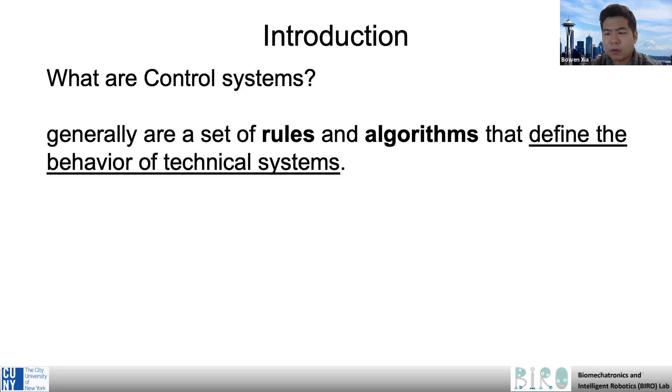And in our case, the control system is responsible for the amount and timing of support provided to the user by the exoskeleton. So in order for a control system to work, sensors and actuators are needed.

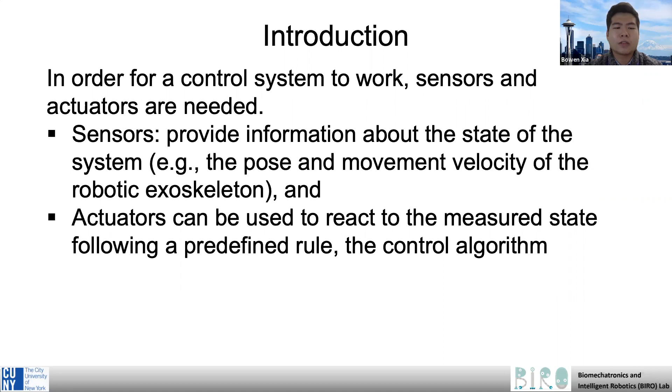We've learned two sensors already. The sensors provide information about the state of the system, for example, the pose and movement velocity of the robotic exoskeleton. Actuators can be used to react to the measured state following a predefined rule, the control algorithm.

That will be the error. And this difference is then sent to the controller that adjusts, for example, the motor current, opens and closes a valve, or executes an action to push the system, which is called the plant.

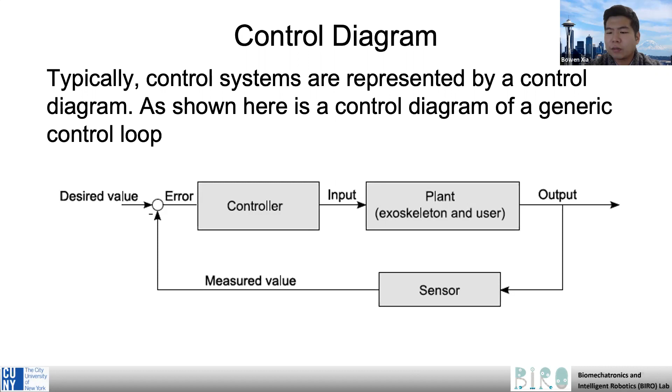The desired value can change over time, and the job of the controller is to make the system follow these changes.

For the controllers, there are high-level controllers and low-level controllers, and normally they are distinguishable. The high-level controllers, sometimes called a control strategy, are a set of rules that defines, for example, in which situation the exoskeleton provides assistive force or executes a guiding movement. The high-level control can include user intention detection to ensure the exoskeleton support suits the user's momentary needs. The lower level control system is responsible for the individual joints and actuators providing that desired support.

It is not uncommon in robotic exoskeletons that the user or a second person remains at least partially in control of the high level control system, for example by controlling the exoskeleton manually by pressing control buttons. However, there are several approaches for exoskeletons to autonomously detect the user's movement intentions and support needs, for example by measuring the user-exoskeleton interaction force or the user's muscle activities.

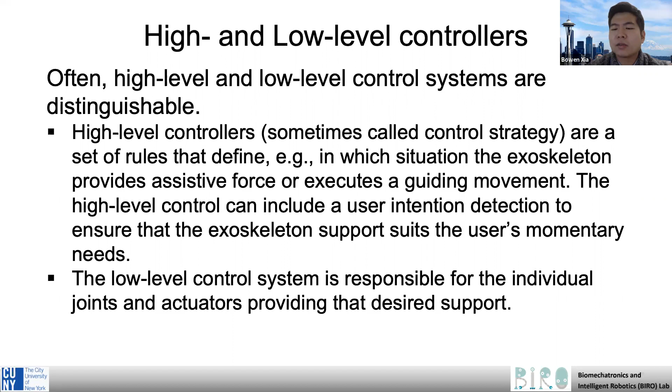The two following examples will help illustrate how the behavior of a robotic exoskeleton is defined by its control systems. The first example would be a control system of a gait restoration exoskeleton.

To control an exoskeleton for gait restoration in users with paraplegia, manual control inputs combined with a position controller are used. As the user's legs are completely paralyzed, the exoskeleton has to provide all the power required to move them. So in this case, the higher level control is implemented as manual control by the user.

Buttons located in the handles of crutches, which are required anyway for balancing, are used to select and initiate movements manually. Different types of movements are recorded and stored in the exoskeleton's control system, and these recordings provide the desired angle trajectories for each of the actuated exoskeleton joints. The movement is triggered by the user.

The low-level joint position controller executes the recorded joint angles, replaying the movement. Then the exoskeleton automatically continues to execute consecutive steps until stopped by the user. Each step can be triggered manually by the user, who then remains in command.

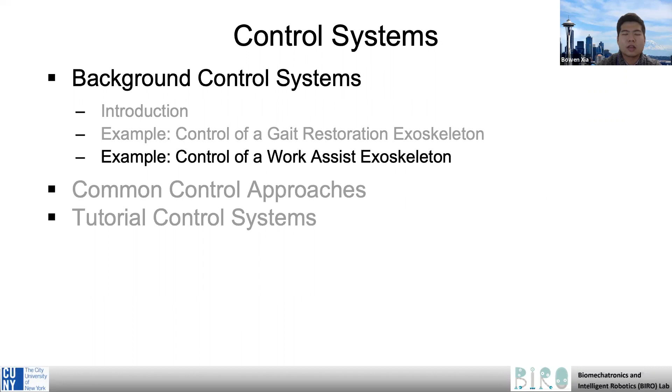The second example is an upper body exoskeleton that supports the user when lifting heavy objects. The device is connected to the user's back and hip like a backpack, and it relieves the user's arms when lifting and carrying a payload.

To detect when the user needs support, sensorized gloves are used in high-level control. A pressure sensor in each palm measures when the exoskeleton user is carrying a heavy object, and only then is a desired vertical assistive force activated.

In this case we are using sensorized gloves, but in some other cases, when there are no gloves, we can detect the force on the arms. We can detect the position of the upper body, and there are a lot of ways to detect whether we are raising our hand, carrying a heavy object, or doing some other task. There are a lot of ways, and here it's just giving us a very brief introduction and the most basic.

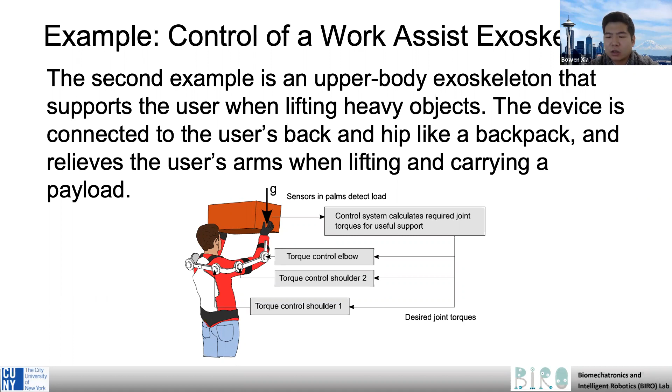How often such a cycle is repeated is defined by the control frequency, which is usually somewhere between a few hundred or a few thousand times per second, hertz. Typically, the low-level control is faster with higher frequency than the high-level control, to give the joint controller time to execute a command before a new command is received.

Now let's talk about the common control approaches. As part of a very large world of control systems, let's take a look at common low-level control approaches used for exoskeletons and other haptic devices. They mostly differ in which variable or physical value is controlled. For closed-loop control, we can only use variables that we can influence and also measure.

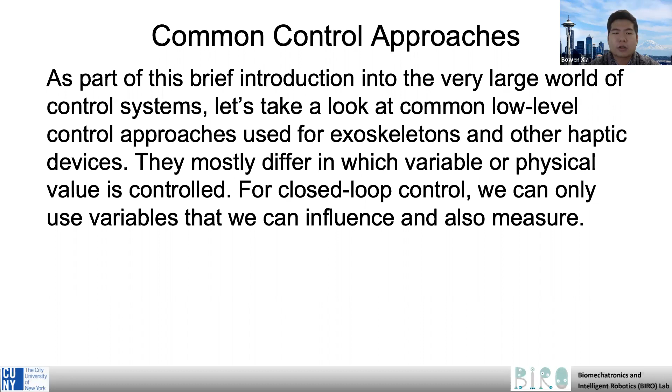So the first one would be position control. A position controller controls a position, the joint angle of the exoskeleton. The controller focuses on only one aspect: to move the exoskeleton joint to a desired angle. It will change the motor's torque until this desired angle is reached.

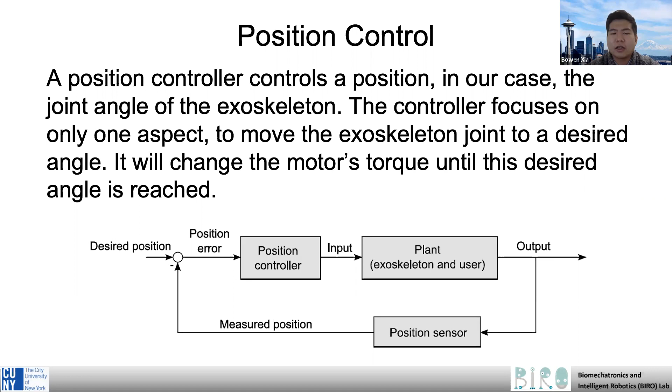Position control systems are very useful to support rigid guided movements or to limit the range of motion of a user, which we'll talk about later in the virtual wall. And then we have the force and torque control. A force controller or a torque controller directly controls a force or a torque. Torque controllers try to keep a predefined desired torque without regard to the angle. Thus, in our case, if the user applies a torque that is higher than the desired joint torque, the exoskeleton will move. It's kind of a trigger.

A closed-loop torque controller requires a force or torque sensor. It also requires the ability to directly change the force applied by the plant, for example, by increasing or decreasing motor current. Force and torque control systems can be very useful to provide support, for example, an upward force to assist lifting without restricting the movement of the user.

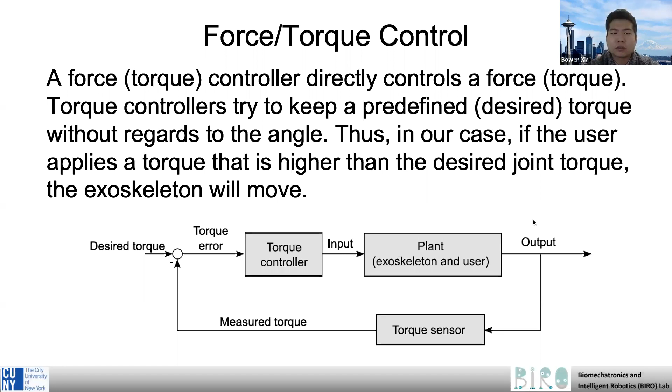And then we have impedance and admittance control. So in an impedance controller, position is measured and force is controlled. In an admittance controller, the force is measured and the movement is controlled accordingly. So they're very similar, but the control variable and the measured variable are different for the impedance controller and admittance controller.

So we have a force sensor to measure the interaction force, and the low-level servo controller is a position controller. Thus, we will use admittance control in our exoskeleton. And in such an admittance controller, this rule often imitates the behavior of a mechanical system: the spring, the damper, the mass. As a simple example, you can think of a controller simulating a mechanical spring. When no force is applied and measured, the robot stays where it is. When a force is applied, the robot moves from its initial position by a distance that is proportional to the force. Thus, the robot behaves as a mechanical spring with a defined stiffness, even though there is no physical spring.

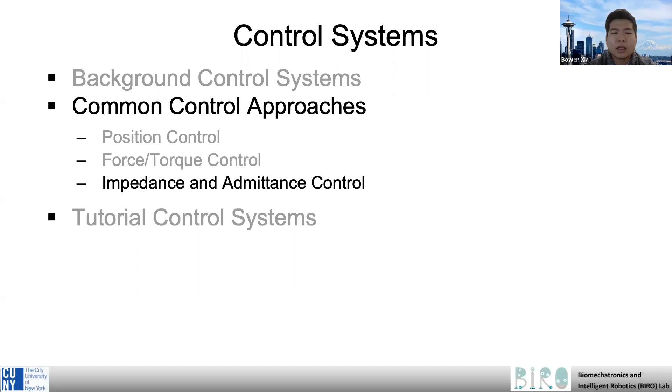So the impedance and admittance controller is in between the position and the force controller, and they are often used when a force sensor measures the interaction.

What happened with him? Hello. Hey, what happened? Yeah, you got cut off. So where did I lose the connection? I think the slide before this, it was going on and off.

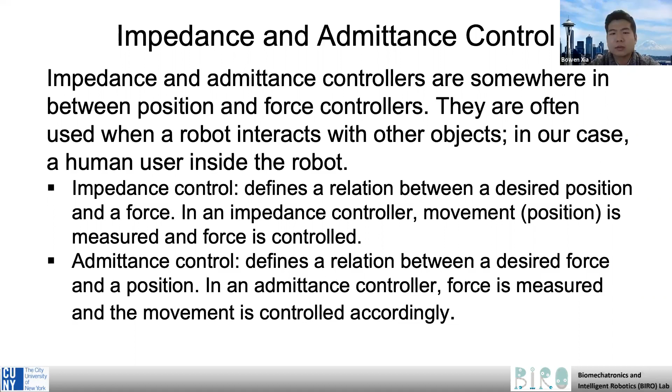Oh, okay. So basically, these two pages are telling us that impedance and admittance control is a combination of the position and the force controller. And we are going to use admittance control, where the input is a force and the output is the position. That's pretty much everything we talked about in these two pages. And here is a simple example. You can think of a controller simulating a mechanical spring. When no force is applied and measured, the robot stays where it is. When the force is applied, the robot moves from its initial position.

Sorry, let me let the students see. Okay. So the robot stays where it is. When the force is applied, the robot moves from its initial position by a distance that is proportional to the force. And thus the robot behaves as a mechanical spring with a defined stiffness, even though there is no physical spring. And we can see this is the control algorithm. The difference between this one and the position controller would be this force error we input to this admittance controller, which will give us a desired position that is input to the position controller, and then to the plant.

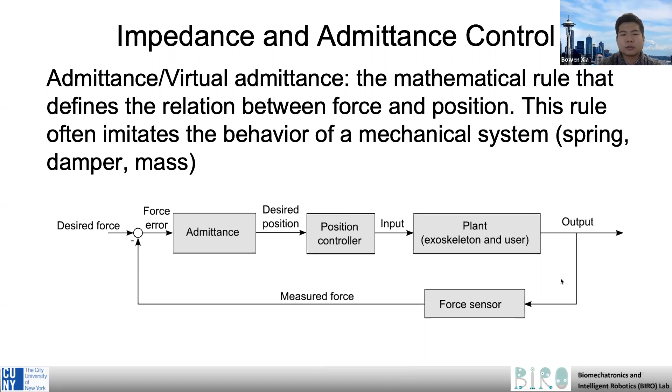I'm sorry, the background noise is a little bit too noisy.

Thank you. And now let's talk about this tutorial about control systems. So now you have been introduced to the basics. We can start implementing different control systems on the exoskeleton and finally make it do something. All of the controllers presented in the following will be integrated into our Arduino software, Arduino IDE. And as we mentioned earlier, only variables that we can influence.

I'm sorry? Was there a question?

Okay, as mentioned earlier, only variables that we can influence and measure can be controlled. So in our exoskeleton, the values measured are the joint angles, which can be measured by the motor's potentiometer, which I think you've learned in the servo motor lab, and the interaction force with the force sensor, which we also learned. And the values we can control with the motor's integrated servo controller are related to the motor's movements.

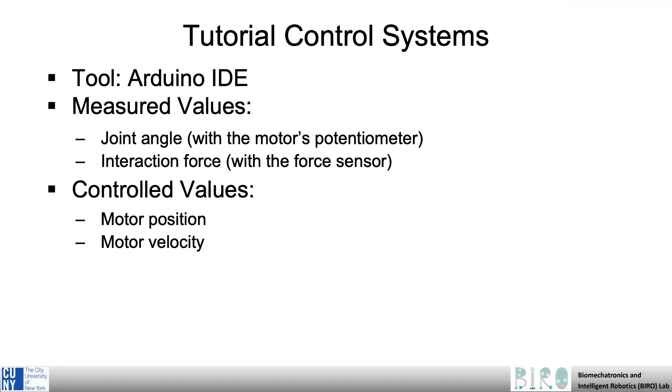And so, attention: after implementing a new controller, always test it first without your arm in the exoskeleton. This is very, very important. The motor is not very strong and it should not be able to hurt you, but better be safe than sorry. So simply fix the exoskeleton's upper arm segment to a table or another convenient object, switch the exoskeleton on and see what the controller does. You can still move it around by hand; hold it at the lower arm interface.

Always test your controllers first to make sure you did not, for example, accidentally invert a sign and the exoskeleton starts moving in the wrong direction, because that would be very, very dangerous. In our case, like we said before, the motor is not very strong, not very powerful, but things could go wrong. In a future design, you might use some very strong motor. For example, you might use some very strong actuation, hydraulic, pneumatic. Those could be very dangerous. So always bear that in mind. Safety comes first.

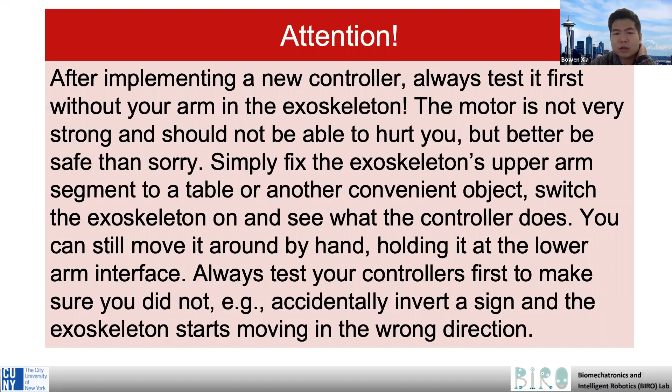And here we got the tutorial of the position control. The first position control one is to move the exoskeleton from 0 degrees to 90 degrees elbow flexion and back. And the second one would be record and replay a trajectory. Make sure that the motor is connected for this tutorial. We do not need the force sensor yet, so you can disconnect it to reduce the amount of cables if you'd like.

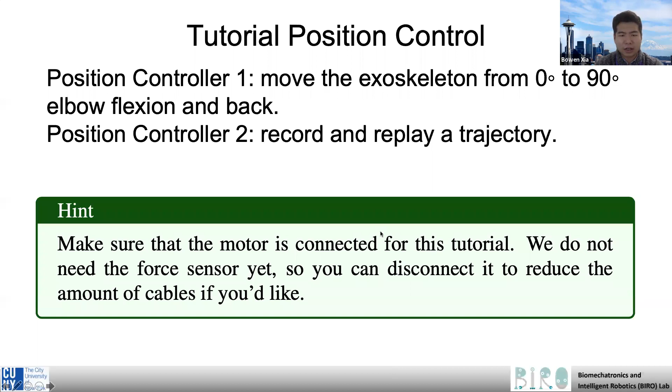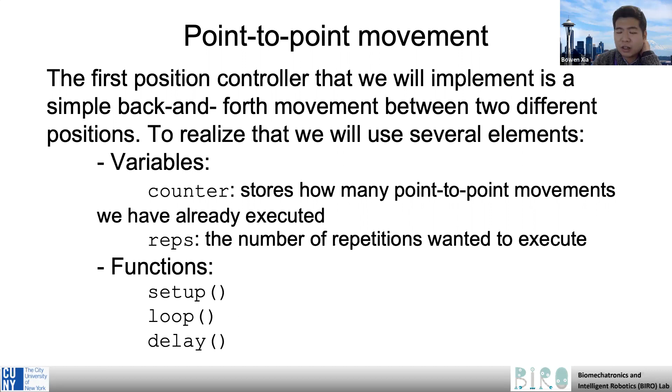And the point-to-point movement. The first controller that we will implement is a simple back and forth movement between two different positions. To realize that, we will use several elements: the variables counter and reps, and the functions setup, loop, delay. We've talked about that. First we define two new variables, on line 6. The counter stores how many point-to-point movements we have already executed. The variable reps in line 7 is the number of repetitions we want to execute. Otherwise, the program would run forever until you unplug the power supply.

And in line 21, there is an increment operator, plus plus. Applying it to our variable counter will increase it by 1. There is also a minus minus operator, but we're not using that right now. Next, we compare our counter variable with the reps variable using the equal sign operator. Note the difference between a single equal sign and a double equal sign. A single equal sign assigns a value to a variable, like in line 6 and line 7, while the double equal sign compares the two values and returns true if they are the same, or false if they are not the same.

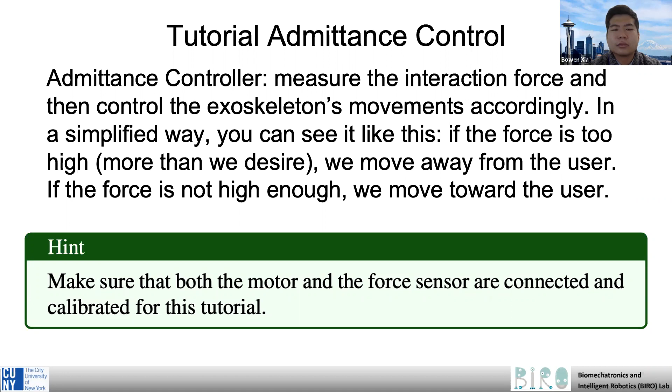And now we talk about the tutorial admittance control. We measure the interaction force and then control the exoskeleton's movement accordingly. In a simplified way, you can see it like this. If the force is too high, more than we desire, we move away from the user. If the force is not high enough, we move towards the user. An implementation of such an admittance controller will measure the force as before and then control the motor's movement.

In this sketch, you will first find that we now have two force variables in line 6, that's forceIs, and force desired, that's in line 7. The first one we know already. This is our measured force. And the second one is the force that we want the exoskeleton to impose on the user to provide support. And in line 8, we have the variable position desired that we initialize with an arbitrary value within our range of motion. And in line 9, we have our control gain.

The higher it is, the more responsive the controller becomes. This can be good as it reacts more actively to adjust the force. On the other hand, a high control gain can quickly result in unstable system behavior.

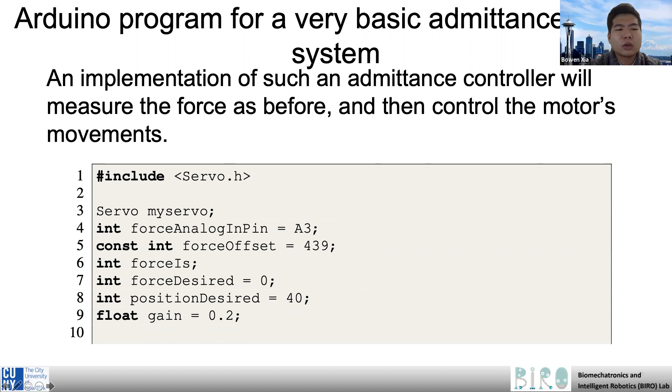But there is something we need to notice, that this one is not using the HX711 chip, but we are using the HX711 chip. So it's going to be slightly different in the pins we're going to use and the variables, but we've already uploaded that to the Dropbox. So you can just use that instead of this one. But still, you need to include those servo.h files.

The loop starts with our force calibration, which is in line 17. At this point, it is important that we offset the force to know its direction. You can also include any additional calibration you might have prepared in a previous step, like we learned in the load cell chapter. So now we add a delay of 10 milliseconds.

That's in line 18. This delay will affect the control frequency, and that is how often the entire control loop is executed. You can change it later for testing.

Line 19 is our admittance control algorithm. You can see that we calculate the difference between the force that we measure and the force that we desire, multiply this difference by our gain, and then adjust our desired position accordingly. Last, we send the new desired position to the position controller of the servo motor, which is in line 20.

If you want the exoskeleton to just move out of the way, set the desired force to 0. In this zero force control, or transparent mode, the user should be able to move freely without being hindered by the exoskeleton. The exoskeleton is basically trying to move out of the way.

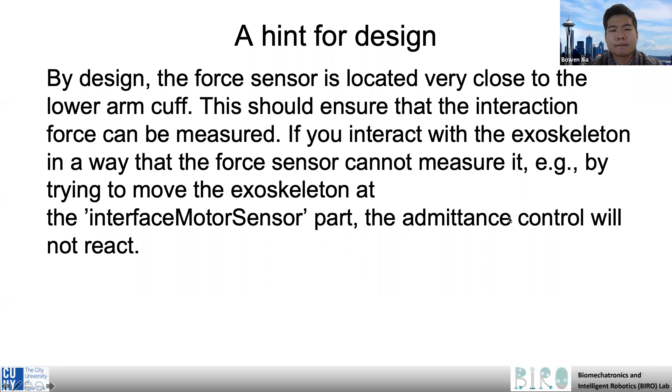Now let's talk about this virtual wall feature, which we actually talked about. So now we will implement a controller that will allow you to move in a certain range, but will prevent you from moving beyond that desired range of motion, which is called hyperextension, if you still remember what we learned in the biomechanics chapter. So the exoskeleton will try to limit and guide your movement to stay within a certain range.

This can be very useful, for example, in rehabilitation or motor learning, to prevent users from executing undesired or even harmful movements. We will implement this controller by using a zero force controller and two threshold values, one on each side of the ROM, range of motion, that limit the possible movement in each direction.

As a simple example, you can think of a controller simulating two stops on each side of this range. Instead of actual physical stops on each side, we are limiting the range of motion of the motor. Let's put it that way.

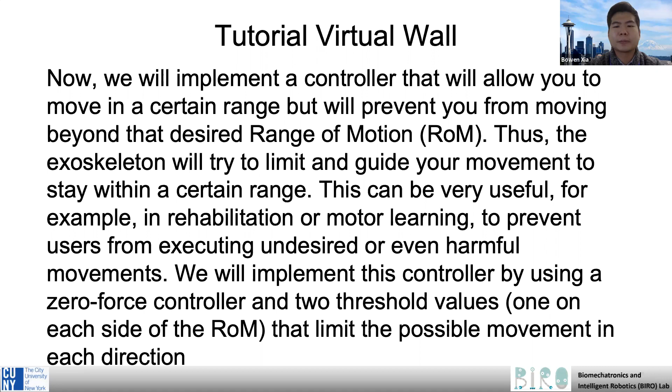Here is the virtual wall controller. The thresholds are defined by two integer variables, in lines 10 and 11.

Adjust these values in your setup if necessary, because everyone has a slightly different range of motion. But normally that would be it. While you are trying your exoskeleton on, you can feel it and read the numbers on your Arduino, and then set up this maximum angle and minimum angle.

So the virtual wall behavior is implemented with two if statements, in line 22 and 23, that check if the new desired position out of the admittance controller is exceeding the defined threshold. If the desired position is out of the defined range, the virtual wall becomes active and adjusts the desired position to the maximum or minimum value before they are sent to the servo control.

The resulting behavior will feel like walls, as the exoskeleton will prevent you from moving beyond the predefined range. You can see that the second statement is an else if statement, which groups it together with the first if. This means the else if will only be evaluated if the if is not already true. This makes sense here because only one of the two conditions can be true at a time. This can save computation time because if there were two simple if statements, both would always be evaluated in every cycle.

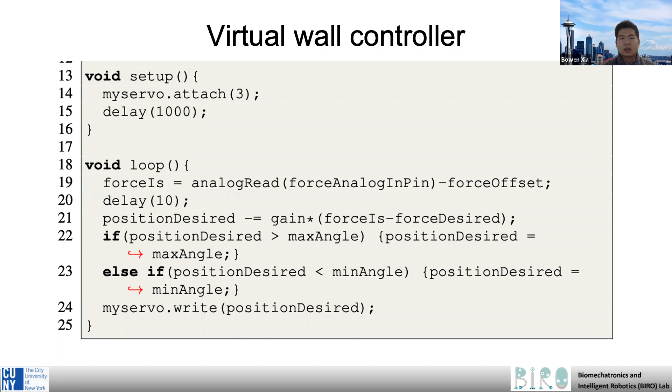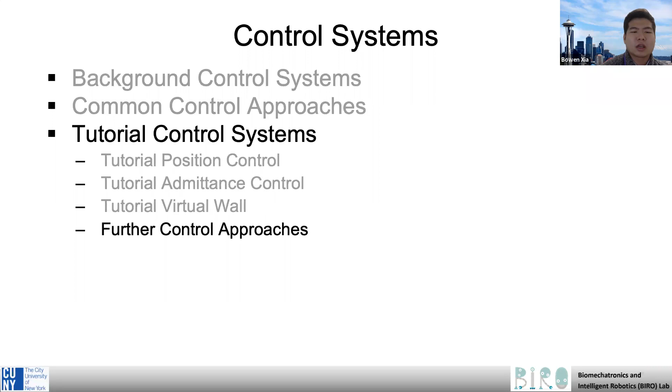And with all those tutorials on the control systems, here are the further approaches. We learned a lot from this final program. We learned sensors, we learned actuators, we learned controls. And with all those we've learned, you can now implement that into your final project and make an exoskeleton that can actually work. And you will feel very proud once that's been produced.